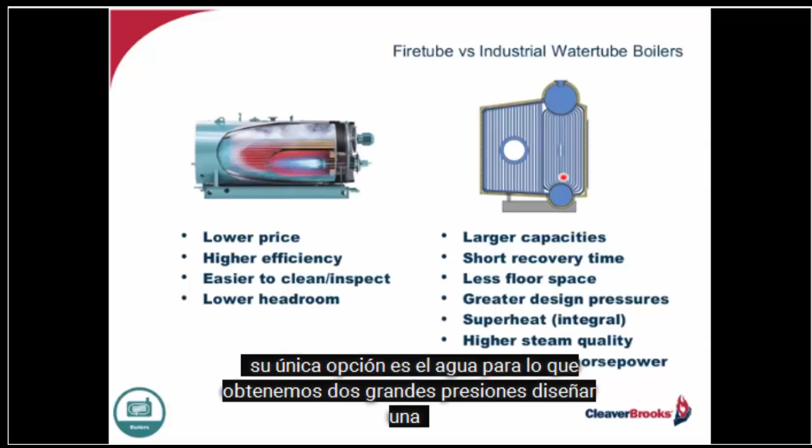What you're looking at here is 4 passes of resistance that we have to overcome. So it really depends upon the particular application, whether we choose a fire tube or a water tube. But when you get to certain capacities, over 2,500 horsepower, your only choice is a water tube. Or if we get to large design pressures and operating pressures as a result, it may be the only real advantage, or the only choice that you would have.

Now, when we look at water tube boilers as a group of product, they start out very small. It's a wide range. Here you're looking at an O-type water tube drum-type boiler, membrane design. This particular one is 150 horsepower, that's about 5,000 pounds of steam.

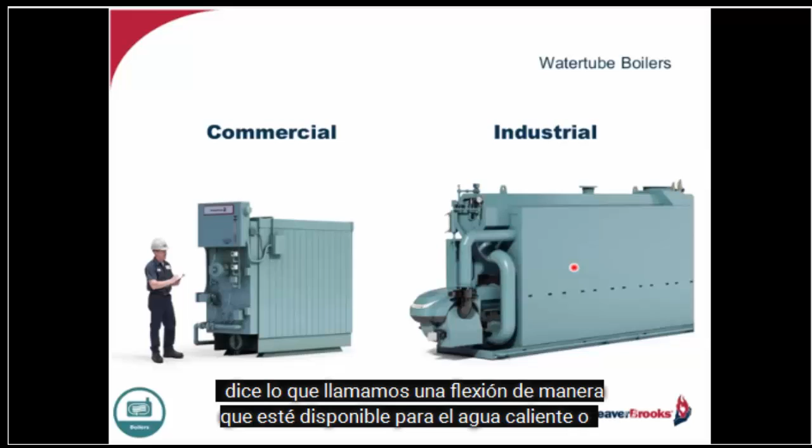Here's another O-type water tube boiler, but it doesn't have vertical tubes. It's got serpentine tubes, what we call a flex tube. So this is available for hot water or steam, low or high pressure steam, sizes up to about 500 horsepower. What you're looking at here, though, is a 300 horsepower boiler, about 10,000 pounds of steam per hour. So we start out small, but then get very large.

And we start looking at different types of water tube boilers. What you're looking at on the screen right now, these are packages. They will ship to the job exactly as you see them, with a burner, casing, and so on. Everything is complete. This is an A-type. It's got an upper drum, or steam drum, and 2 lower mud drums.

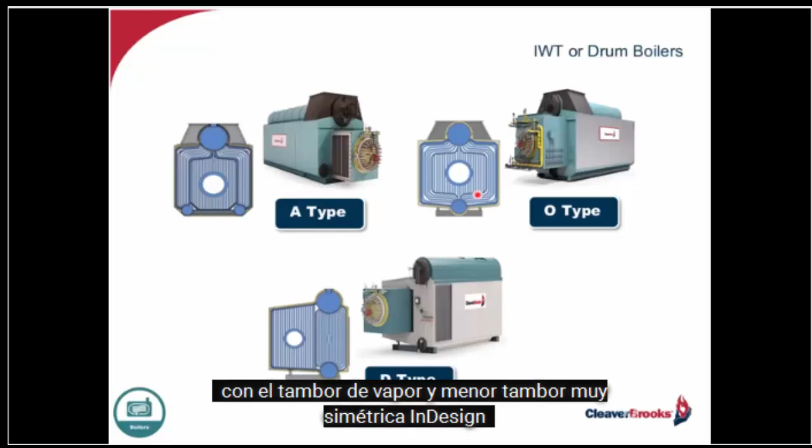We have an O-type configuration with a steam drum and lower drum, very symmetrical in design. This was primarily used for rental type boilers that would go on trailers. If you have a D-type, as you see here, it has a very high center of gravity. These are very low center of gravity, so it ships very well on a truck and very, very good for rental type applications, the O-type.

And then, of course, the D gets its name because it looks like a D, and it could be either a left-hand or a right-hand burner configuration. This is a left-hand burner. So you've got your upper drum and lower drum, and then your furnace is over here. So the D-type, the A, and the O-type configuration. And these are all packages and can ship either this way or as modules, and I'll show you that a little bit later.

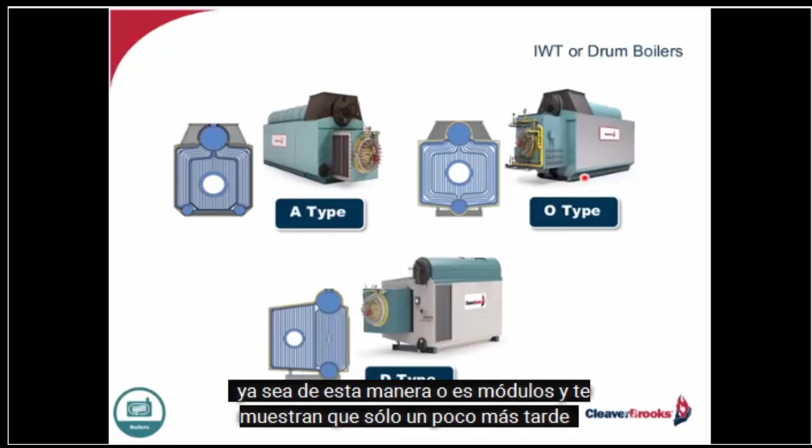Let's see, I missed a slide here, I think. Oh, here we go. Now, when we look at water tube boilers, these are what we call industrial water tubes, or drum-type boilers.

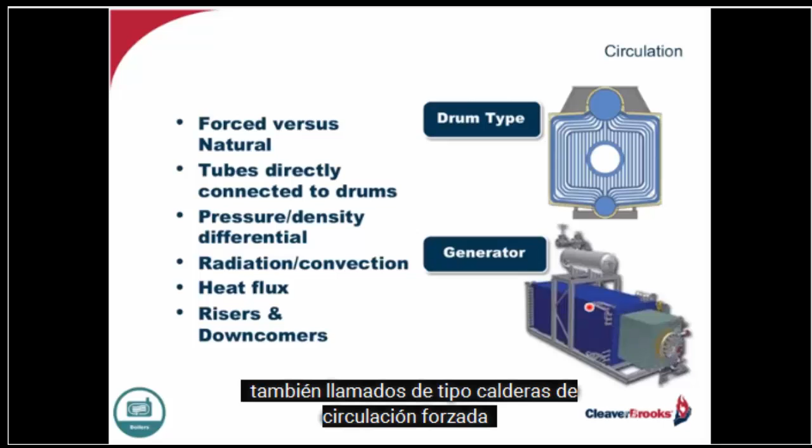What you see down here is a generator, at least what I used to call it in the early days, when I started here at Cleaver-Brooks, we called these steam generators. They're also called forced circulation type boilers. What you see here happens to be an O-type, but it's a drum-type boiler, and it relies on natural circulation. It's the pressure density differential between the upper and lower drums that gives us that circulation.

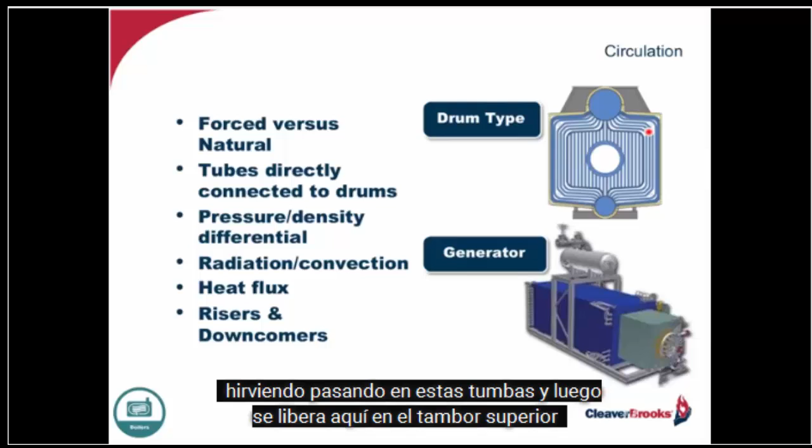So as we begin to transfer the heat in the furnace, and we start to generate steam, we have nucleate boiling going on in these tubes, and then it releases up here in the upper drum, but it's all done naturally. The saturated water, below the steam line, the steam accumulation area in the upper drum, finds its way through these downcomers, and we start to recirculate. So it's all natural circulation.

The steam generator that you see here requires a pump. What you have is about, let's say, 80% steam in these tubes versus 20% water. Just the opposite in a water tube boiler. The ratio of steam to water is much higher on the water side, 80% water as opposed to 20% steam. That's how we get that natural thermal circulation.

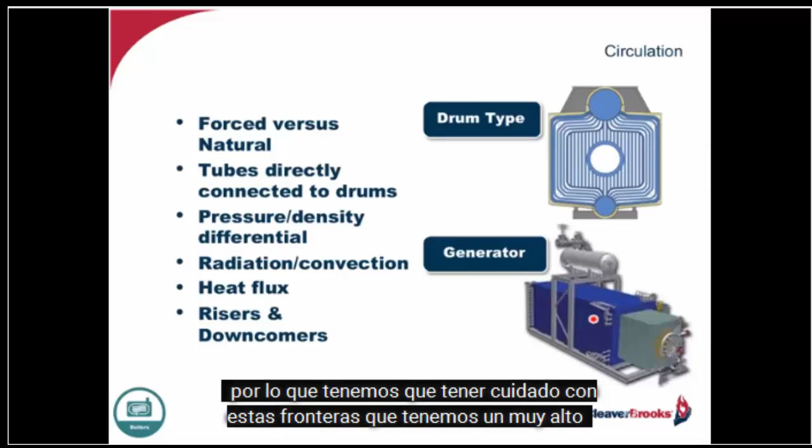These steam generators are good boilers. They've got good applications, but what we're concerned about with those is what we call high heat flux, the temperature differences or temperature gradients that can occur because we have so much steam. So we've got to be careful with these boilers that we have very, very high water quality, or we can have some problems. They're quick steamers. They do an excellent job from that perspective, but we've got to watch the water quality.

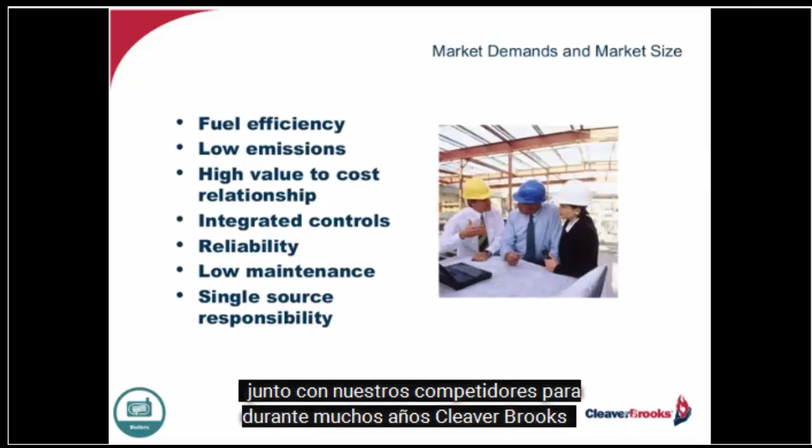As far as the market is concerned, we've been in this market along with our competitors for many years, Cleaver-Brooks for over 80 years, and we've gone out and talked to our customers and looked at applications. When you're talking about industrial water tube boilers, many of these units that we build are custom made.

We have to look very closely at that system, what its requirements are, both fire side and water side, the steam requirements as well as the emission requirements, and what the turn down has to be. It gets very complicated because these jobs are so large in terms of steam capacity. So our customers have been telling us all along what we need.

We definitely have to have fuel efficiency because of the inordinate amount of fuel that these boilers are consuming. If we can save 1 or 2 or 3% in fuel, we're not talking about chump change here. We're talking large, major dollars.

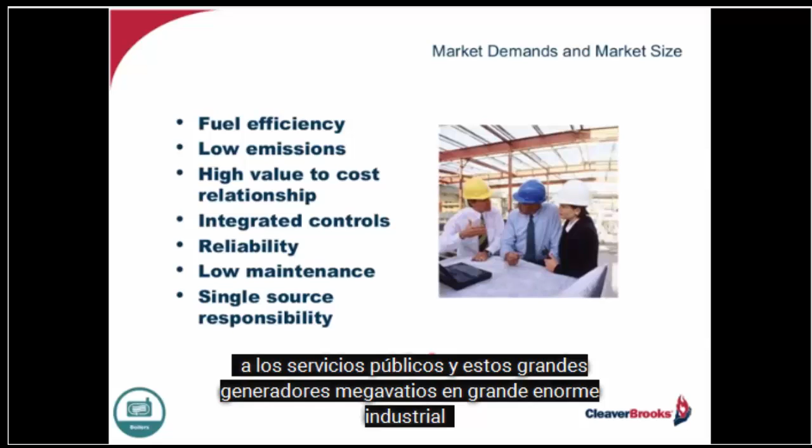Low emissions, of course. This is something we are becoming much more cognizant of as a nation, as a world, in terms of the pollutions that come out of stacks. And the ones being looked at most closely starts with the mobile sources with our cars, but then it goes quickly to utilities and these large megawatt generators and large, huge industrial water tube boilers that we'll be talking about today that emit a lot of effluent out of that stack.

We've got to look at these emissions and make sure that we not only conserve the carbon footprint by burning less fuel, but what's coming out of the stack has to be also very closely looked at, so that we don't pollute the air, cause ozone, and have other problems in terms of carbon monoxide and particulate.

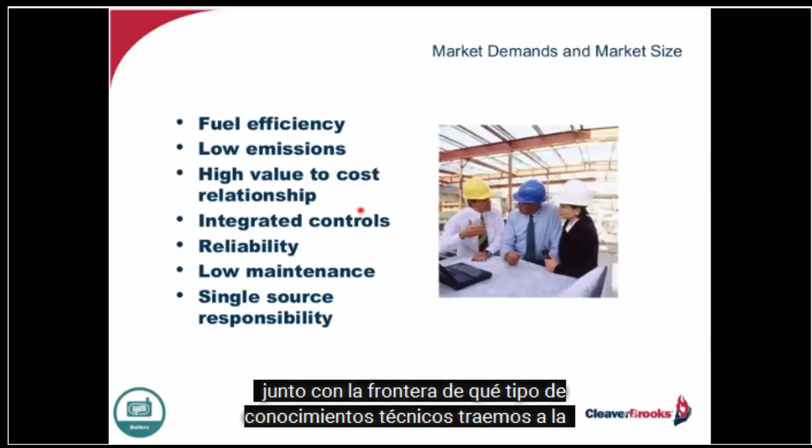And then, of course, they're saying we want a high value to cost relationship. It's not just the boiler cost, it's what do we as an industry deliver along with that boiler? What kind of technical expertise do we bring to the job? How can we best serve that customer in attaining his needs?

And then they want integrated controls. Reliability, of course, is key, making sure that these boilers stay online regularly. We don't want outages. We want to make sure we can anticipate problems before they occur. That gets into the integrated controls, ties into reliability. Low maintenance—what can we do to lower the cost of maintenance, lower the downtime?

And of course, single source responsibility. That just ties into getting rid of the finger pointing, right? Oh, it's the burner guy's problem. Oh, it's the control guy's problem. Oh, it's the boiler guy's problem. No. One person, single source responsibility, bring it all together, be accountable. So it's a tall order.

What about the market? Over 200,000 pounds. You can see here the number of projects and how they have increased over the years. Starting out at 2005, and you see 2012 this year projected, we've gone from a nominal number of packaged units back in 2005, and all of a sudden increasing rapidly. What's driving that is there's an aging population of large industrial boilers out there.

A lot of these are coal-fired, so they're concerned about the emissions as well. They're also looking at ways of maybe burning other sustainable fuels like biofuels. And now, because natural gas is becoming more and more prevalent and available, we've got a lot more of it, especially with the fracking processes we're going through today. And it's getting cheaper. So we've got a lot of customers saying, look, I think it's time to bite the bullet. We'll tear this old boiler out, put a new one in, or we'll retrofit and take this old boiler that I have and bring it up to today's standards.

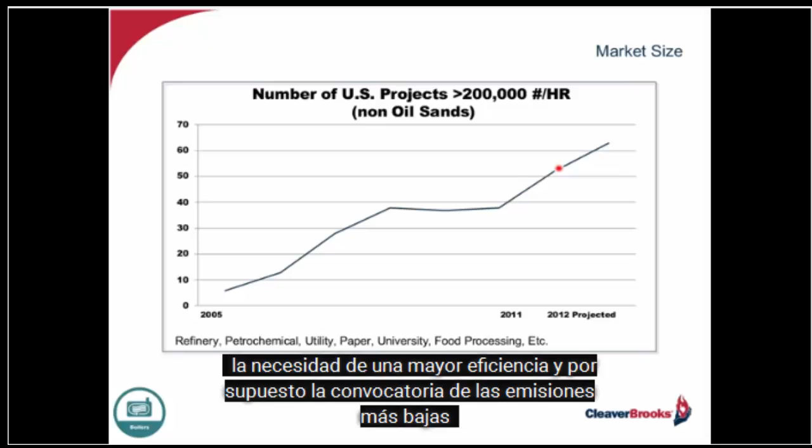So it's about a $200 million market today, over 200,000 pounds per hour. That's about what it is today. And what's driving it, of course, is old boilers, the need for higher efficiencies, and then, of course, the call for lower emissions.

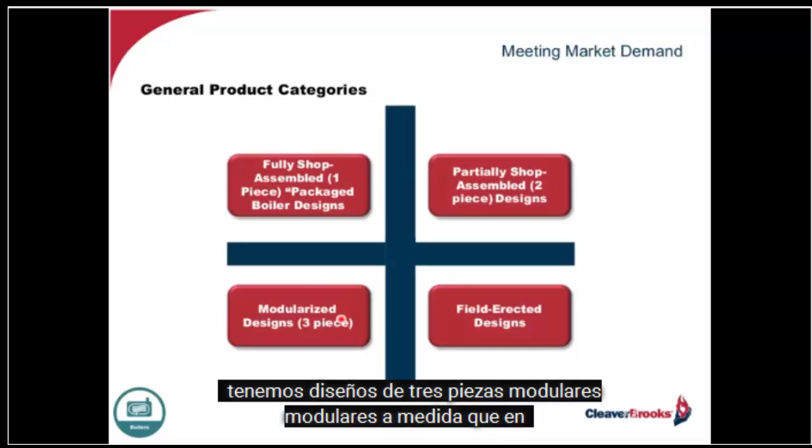Now, when we look at the way that our industry is addressing these needs, what I'm talking about today primarily are going to be packaged units. So we've got a fully assembled one-piece package, which I showed you originally with the A, D, and O type boilers. We also have partially shop-assembled two-piece designs, which I'll show you. Then we have modularized three-piece designs as you get into larger capacity needs. And then we have the field-erected.

So for today's discussion and our focus, we're looking at 200,000 pounds per hour up to 650,000 that can be built or delivered in these forms.

Now, how does it break out? Well, if we look at one-piece, fully assembled units, 10,000 to 300,000 pounds of steam per hour, we can ship those as a complete unit in one piece, and I'll show you some examples of that.

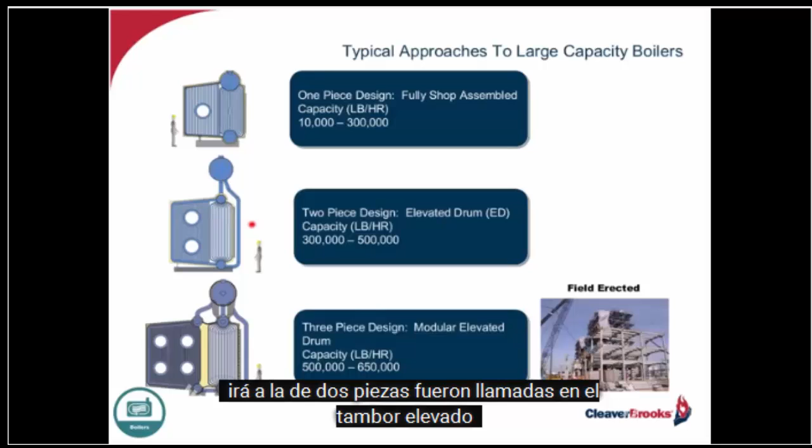As we get into larger capacities, 300,000 to 500,000 pounds per hour, we'll go to the two-piece. We're calling it an elevated drum, two-piece, and I'll show you how that works. And larger sizes, packages, modularized packages from 500 to 650,000 pounds of steam per hour, that's 19,000 horsepower, come in three pieces. And then, of course, there's the old reliable field-erected unit.

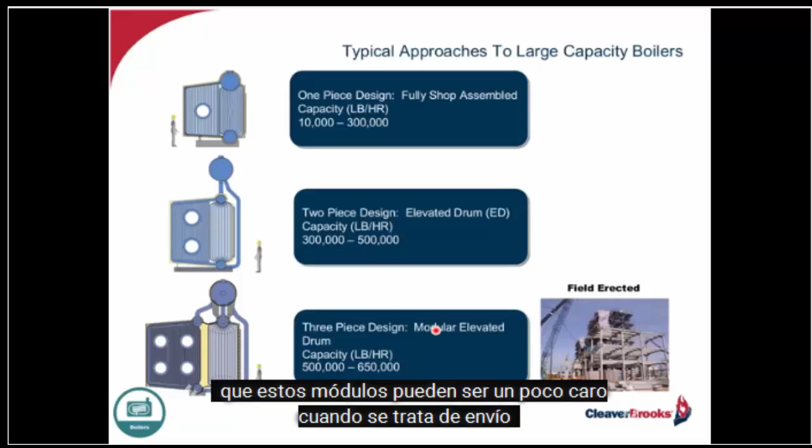Now, I will say that these modules can get a little expensive when it comes to shipping. And in some cases, the only answer that our customer might have, if we're going to be truthful and honest with him or her, would be a field erected. Maybe it's got to be stick built, as we say. It has its place, but our customers are saying single source responsibility, let's mitigate the field time, and if you can make these boilers, either modules or packages, more convenient and less expensive for me to install and operate overall, that's the way I'll go. But we also have to look at the field erected as an option.

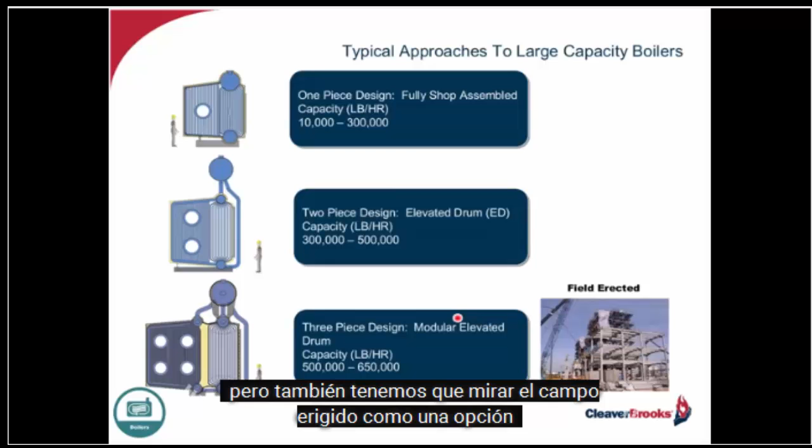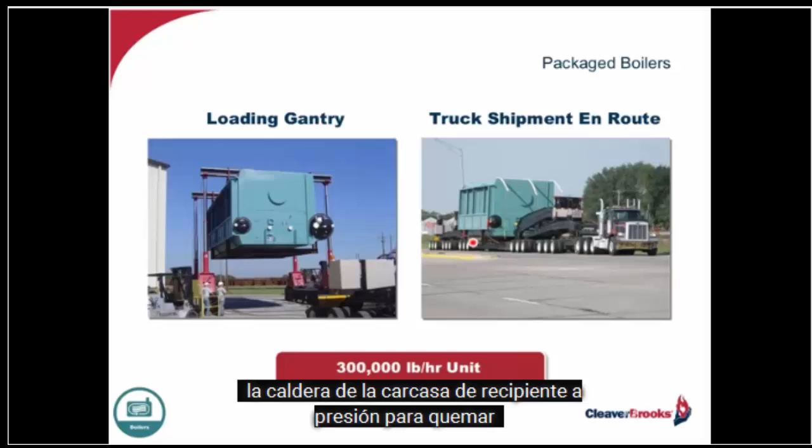Now, here's a package boiler, 300,000 pounds per hour. Normally when these boilers get over 225,000 pounds per hour, we can't ship them as a complete unit. We've got to ship the burner and controls loose, and that's what you're seeing right here. You can see it on the truck. This truck, by the way, has 74 tires if you were to count them. But it's complete - it will arrive at the job site complete with the boiler, the pressure vessel, the casing, the burner, the controls, all done.

Now here's a 50,000 pound per hour boiler, and what I wanted to call your attention to here is the single source responsibility, the total integration is reflected here in this picture. Now it looks somewhat complicated, but really it isn't. It's a D-type boiler, 50,000 pounds per hour, as you can see.

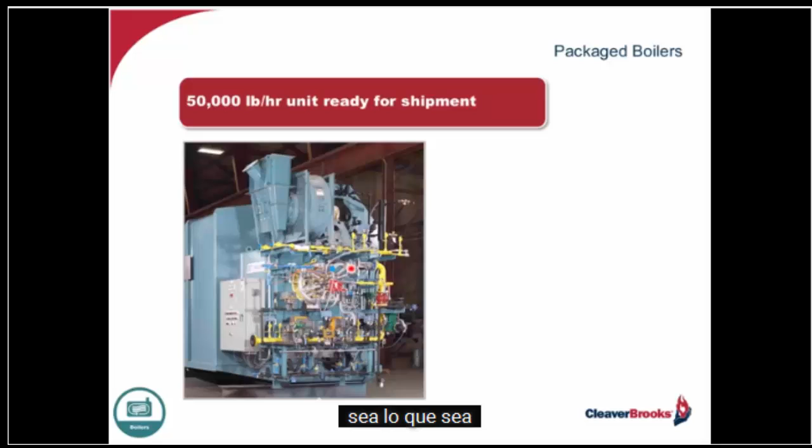We've got our fuel line all pre-piped and wired. Our pilot line coming in here. We've got standby oil - this is our oil line coming in when we go and burn number 2 or number 4, number 6, whatever it might be, oil. We also have our secondary air fan for combustion. That's all completely packaged, wired, and mounted. This is your flue gas or your secondary air inlet for combustion.

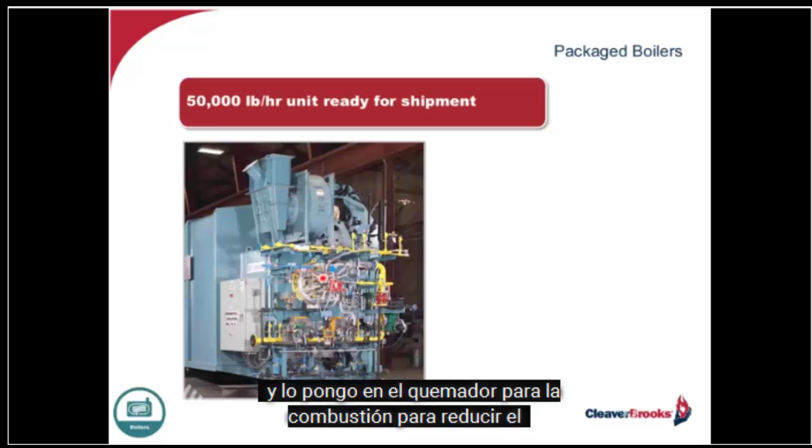This is the connection for flue gas recirculation. In this particular case, we had to lower the NOx. We had a low NOx burner on here, but we also had to introduce flue gas recirculation to lower the NOx even more, to take it down to, let's say, 20 parts per million from a normal 120. So we had to use some of the flue gas coming out of the stack, ducted into the secondary air supply, and bring it into the burner for combustion to lower what we call thermal NOx. That's called flue gas recirculation.

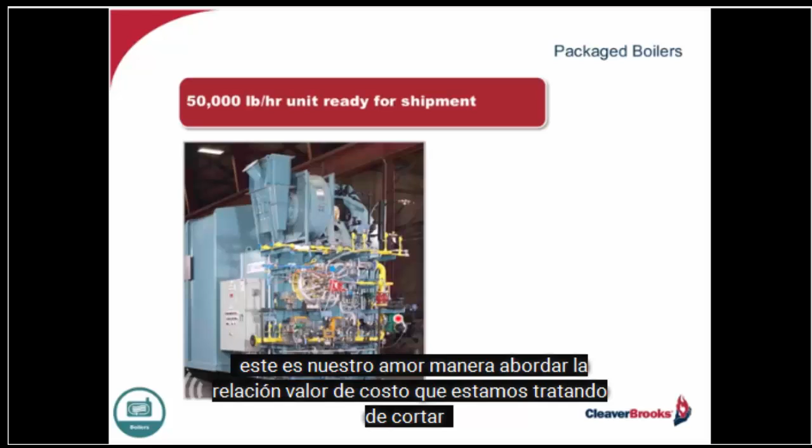But again, when you see these packages, whether they come from us or one of our competitors, this is our way of addressing single source responsibility. This is our way of addressing the cost-value relationship. We're trying to cut cost out of the total project and give our customers as efficient and reliable a package as we possibly can.

In an ideal situation, where we haven't got conflict with other disciplines on the job, it takes about 25 man days to mount that burner and all the controls and wire it on this boiler. About 25 man days.

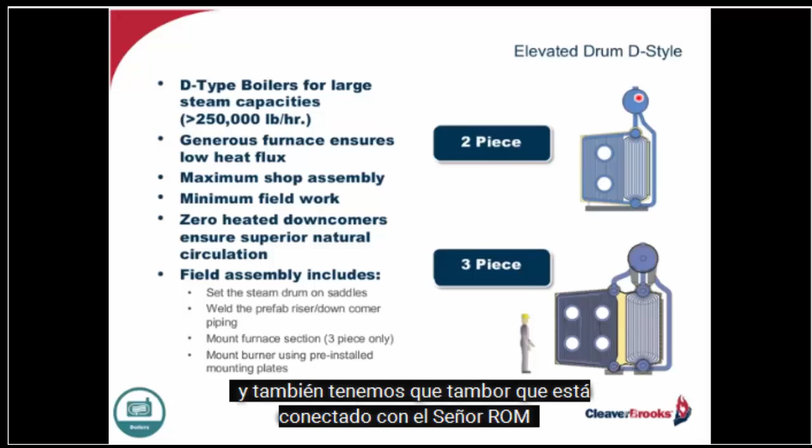Now we're going to move from the packaged water tube boiler to what we call the elevated drum, or 2-piece and 3-piece modules. In this particular case, I'm showing you a D-type design configuration. You can see we have the elevated drum, which is connected to the lower drum through what we're calling the downcomer.

Here we have the generating section of the furnace side. These tubes are generating steam into this header, up into the steam drum. These range anywhere from this capacity, 300,000 to 650,000 pounds per hour.

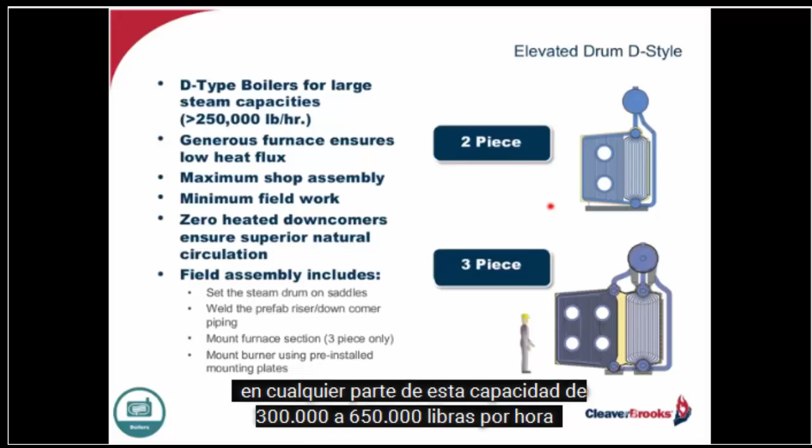A 650,000 pound per hour boiler is going to have a total burner input of about 780 million BTUs. So looking at this particular boiler, which is 650,000 pounds per hour, we have 4 burners, each rated at about 195 million BTUs per hour.

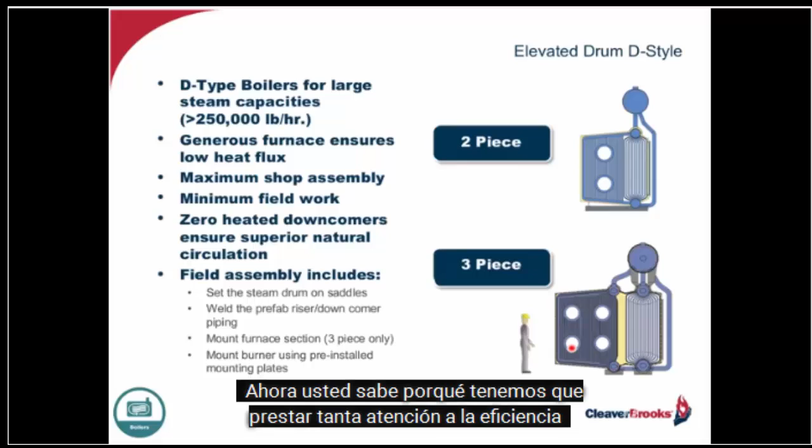Now you know why we have to pay so much attention to efficiency, right? We're burning an awful lot of gas here.

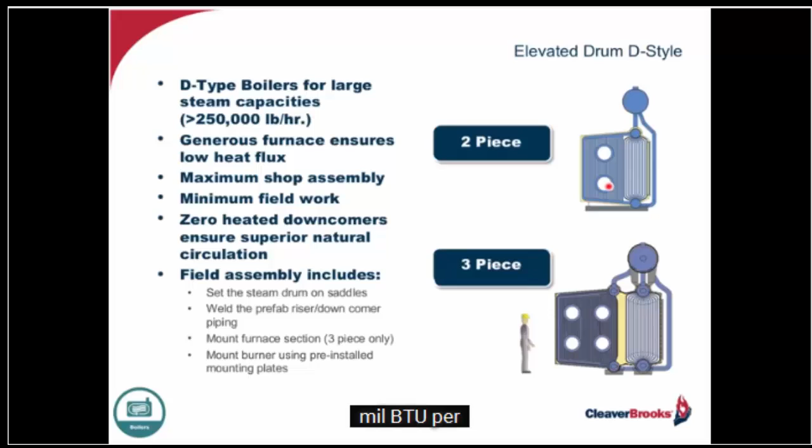The thing about these elevated drum designs, the other advantage it gives us, is that we can make this drum as large as we want, and it does not encroach on either the convective side or the radiant side of our boiler. That means we can increase the size of the furnace to lower the heat release rate down to areas in the 60 to 70,000 BTU per cubic foot of furnace volume.

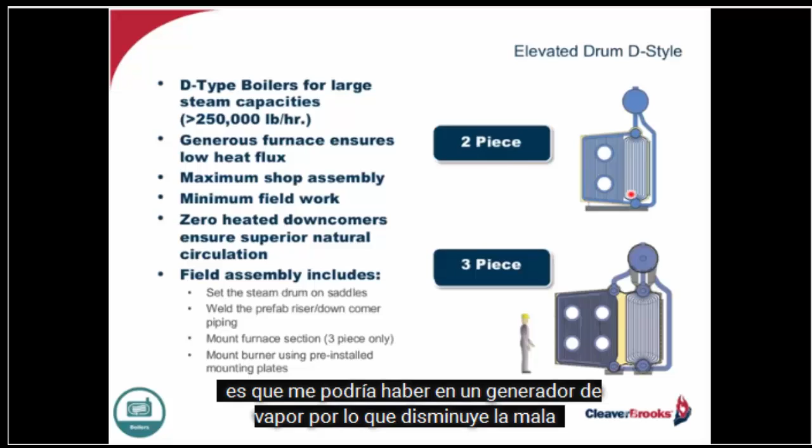Also looking at that heating surface, that's about 47 to 50,000 BTU per square foot. Why is that important? Well, from a couple of standpoints, not the least of which is the feed water coming into this boiler. If I can lower the absorption rate in that furnace, I don't have the rapid heat flux I might have in a steam generator, so it mitigates the temperature transients I would get in other types of boilers with higher heat release. It also helps from the emission perspective, since I can control the flame temperature more readily to lower the NOx requirement.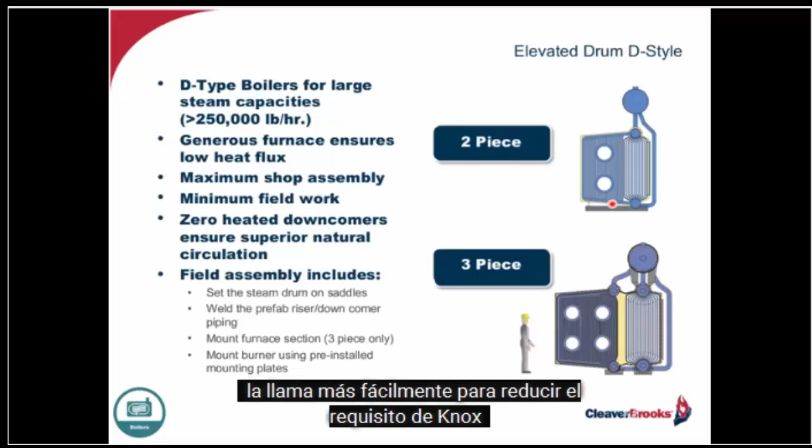The other thing with these are the downcomers, which are isolated, giving me rapid circulation through these generating tubes as they generate steam and water into this upper drum to be separated, which I'll show you as well.

Now, looking at the elevated drum design, here's this D-style 225,000 pound per hour package boiler. They get larger as you go along. Here's a 300,000 pound per hour boiler that requires 2 burners, and then the ED-type right here at 500,000. All I'm trying to show you is how this boiler gets so much taller, but not that much wider.

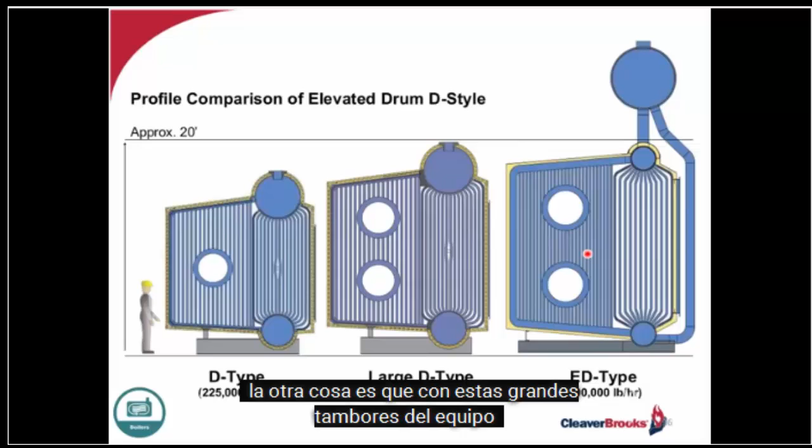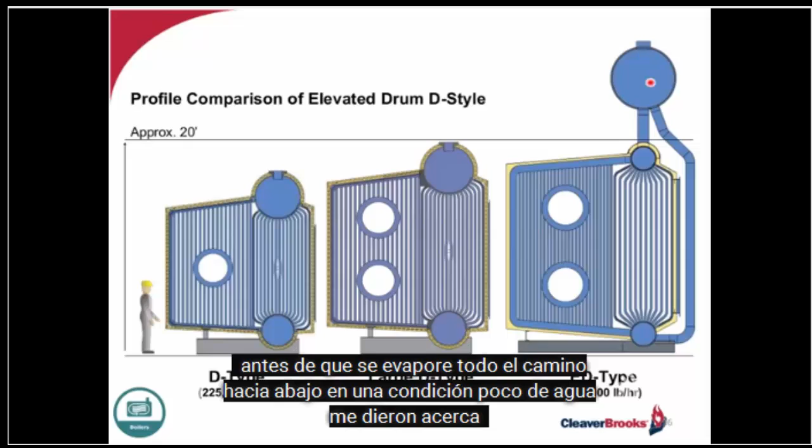The other thing is that with these large steam drums, I've got more steam accumulation area. So when there's a sudden surge or need for steam, I've got more accumulation in this upper drum than otherwise, because with this modular design I can make it bigger. I've also got a larger margin of water - anywhere from about a third of this drum is water - so before it evaporates all the way down to a low water condition, I've got about 5 minutes between proper level and low water. We certainly don't want a waterside occurrence here with these boilers. No boiler for that matter - even a 30-gallon water heater is devastating.

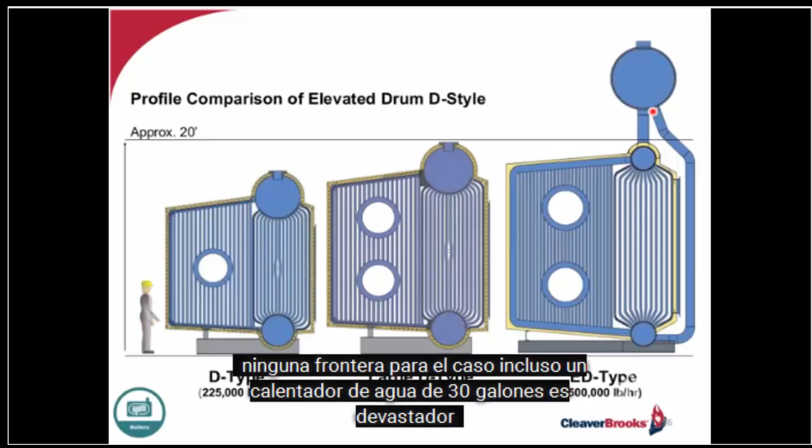Here you see the 425,000 pound per hour elevated drum water tube boiler.

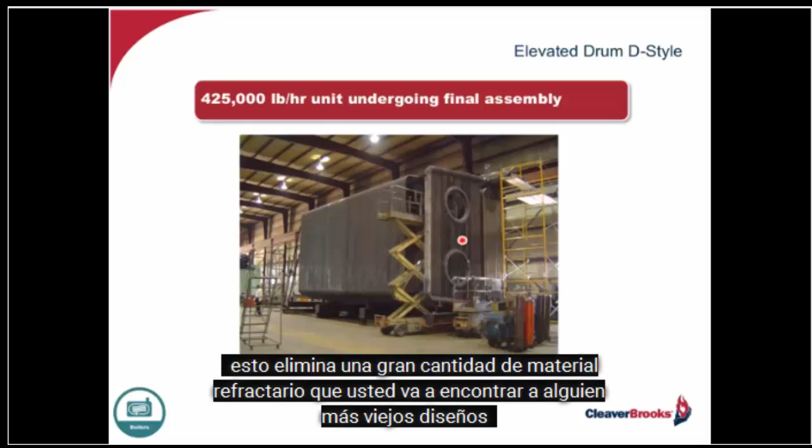You'll notice it's kind of hard to see in this picture, but these tubes are all membraned - attached to the drum, or to the manifold, I should say. In this case, our steam drum is a separate piece mounted in the field, but they're all membrane tubes. This eliminates a lot of the refractory found in some older designs, which gets back to what our customers are saying: let's lower that maintenance requirement.

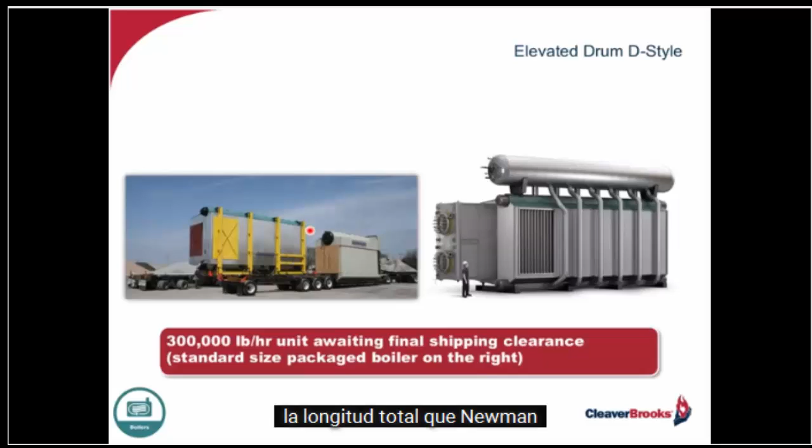Now here's a 300,000 pound per hour unit which is being shipped. It's an elevated drum boiler. You can see the size difference between it and a standard size package water tube boiler. This is 300,000 pounds per hour. It's got superheat, and that, like I showed you in that picture before, is going to extend the overall length of that unit because of the superheat.

Now this gives you a good shot of what that elevated drum boiler looks like, whether it be a single, a two-piece or a three-piece. You can see here the upper steam drum. These are the downcomers. We need that pressure density differential to give us that good circulation. These isolated downcomers help that considerably. Then, of course, you've got your generating section here, and this is your flue gas outlet.

Now, this particular one is a 500,000 pound per hour elevated drum water tube boiler. It's about 600 million BTU input. So each one of these burners is about 300 million BTU.

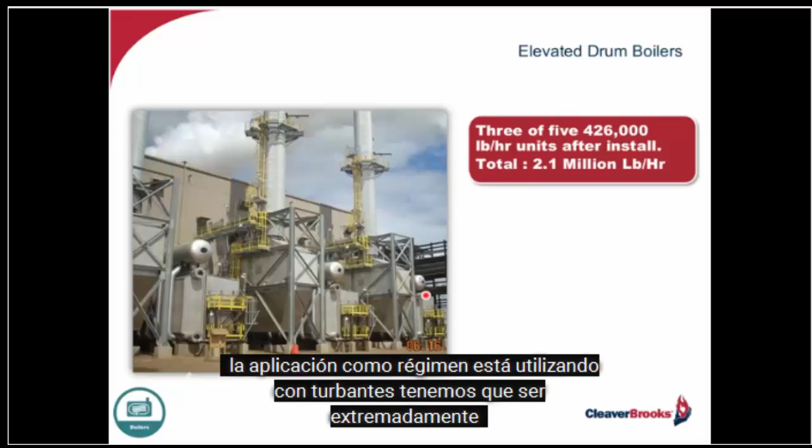Now here you see a utility application where we have 5, 426,000 pound per hour boilers equating to 2.1 million pounds per hour. You only see 3 of them, but there are actually 5 on the job. Now, these are economizers that you see on the side of the boiler. Because this is a utility application, these boilers are generating steam for steam turbines that are driving generators. Anytime you get into the application of steam being used with turbines, we have to be extremely concerned about water quality.

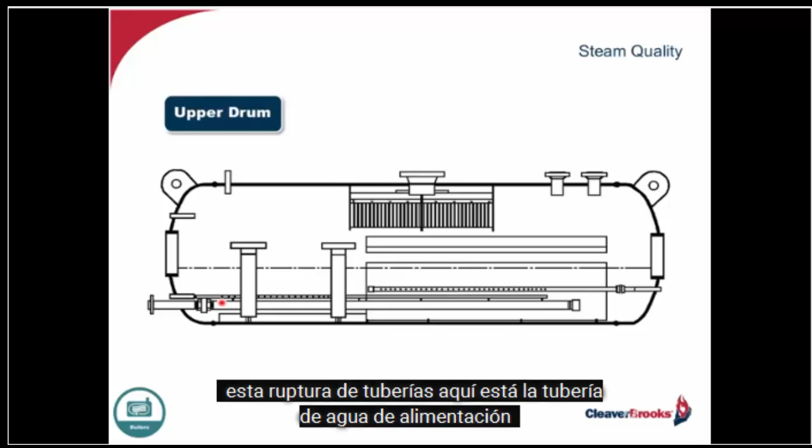This is the upper drum. It's kind of a standard design that you see right here, the upper drum or the steam drum in a water tube boiler. This pipe is your feed water pipe. This is your chemical dispersion tube. Now, what you also have is a chevron separator below the steam nozzle itself. There are also some other baffles, which I'll show you next, that are right in front of the steam generating tubes. The whole idea here is to separate the steam as effectively as we possibly can from the saturated water.

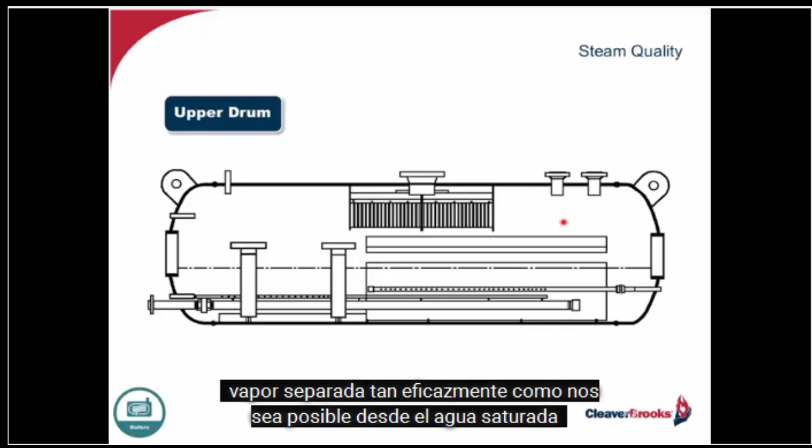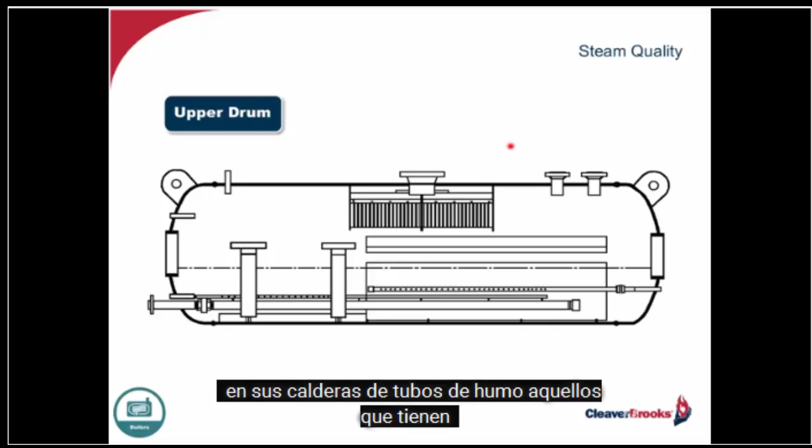That's what we call steam quality. How much moisture is in that steam when it goes out the nozzle into my system? With a fire tube boiler, you're talking about 98.5% pure. In other words, it's got about 1.5% moisture in your fire tube boilers. Those have to have steam separators in the steam line to be able to improve the overall quality of the steam, to remove the moisture.

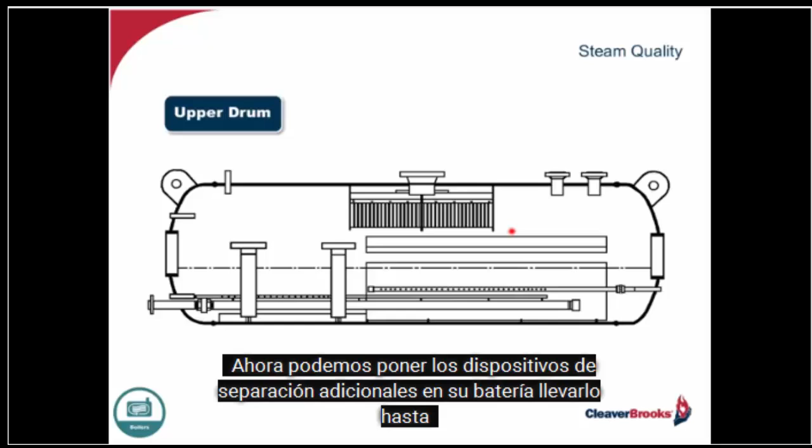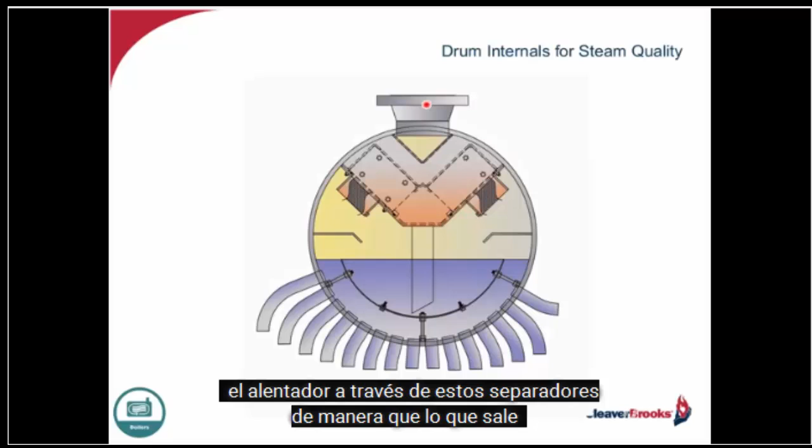Water tube boilers are normally set up to achieve 99.5% quality, giving us only 0.5% moisture. Now we can put additional separating devices in this drum and take us down further, and that's what you'll see here, a chevron separator. You've got your baffles here, which are now in front of your generating tubes. The whole idea is for this steam to take a very circuitous route through the separators, so that what comes out can be as low as only 0.1% moisture. And that could be critical for those applications, especially turbines, that cannot tolerate any moisture in that steam.

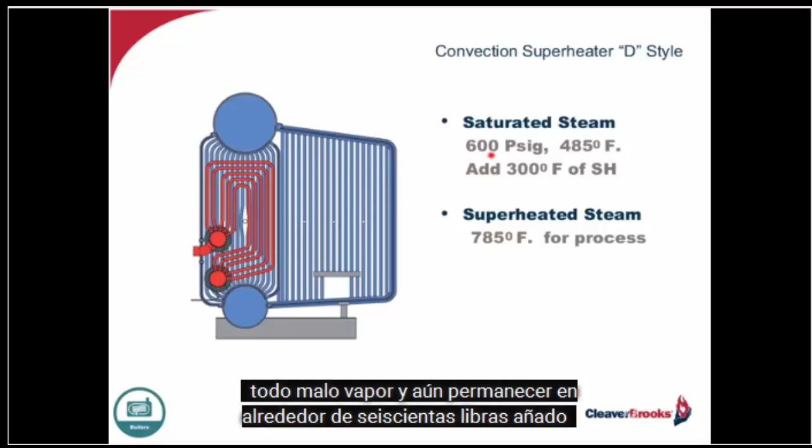Now, what you'll also find in what I showed you before are superheaters. What are superheaters? Superheaters take that saturated steam when it comes out of the nozzle, and it heats it further. It adds additional sensible energy to it. In other words, I've got 600-pound steam here, which is equivalent to 485 degrees Fahrenheit. But what I want to do is raise the temperature of that steam and still stay at about 600 pounds. I add superheat. So what I'm doing is adding sensible energy. So now my 485 degree steam has been boosted to 785 degrees.

Now remember, the critical point of water, where it becomes nothing but a working mass of steam, with no further evaporation because all the moisture is gone, is 705 degrees, equivalent to 3,200 pounds. Here I have 785 degree steam, but only about 600 pounds. That's superheat, sensible energy added to that steam.

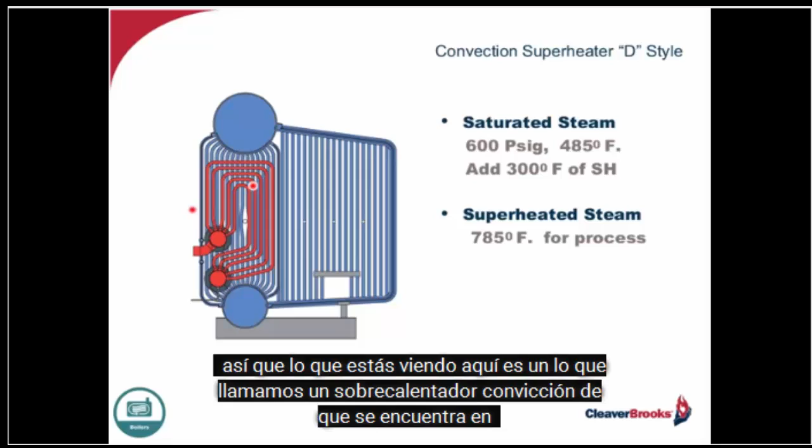So what you're looking at here is what we call a convection superheater. It's in the convection side of my boiler. This is my furnace, here's the convection. So my superheater is taking steam from the upper drum, bringing it in, taking it through a series of baffles and headers, heating it up further, and discharging here.

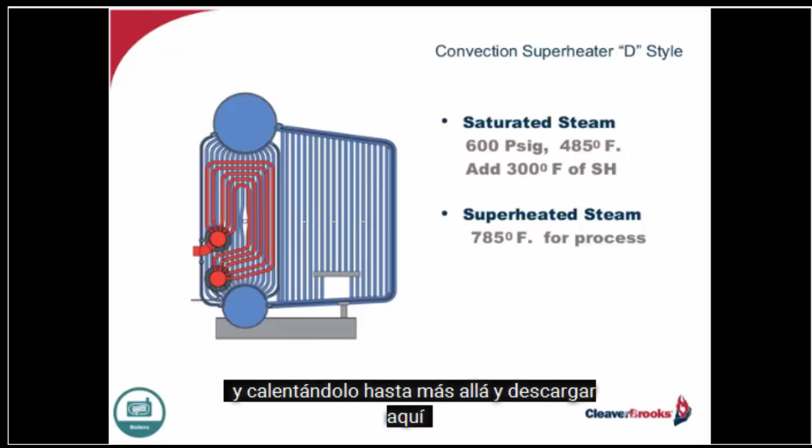Looking at it from a plan view, here's my furnace. I've got vestibule tubes here in the back where those hot gases exit, come across the superheater, add that sensible energy before it goes up and out the stack. In this particular case, it was going to an economizer.

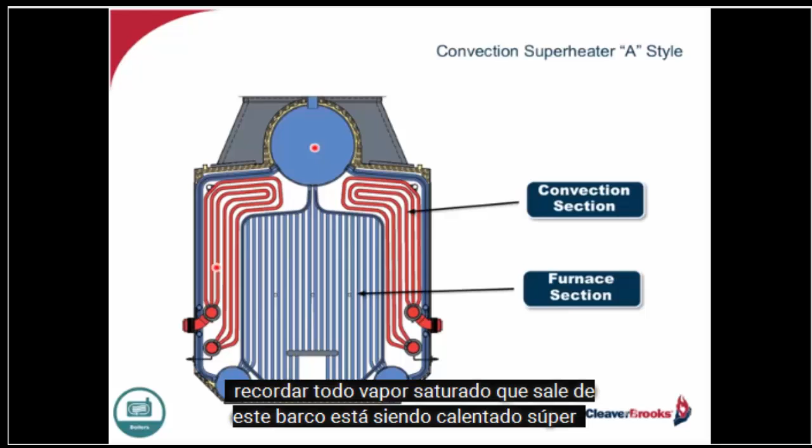Now here's an A-type boiler with a convective superheater system. Because we bifurcate, or drive our flue gas down the center of an A boiler, that gas divides and goes equally either side of the boiler through the convection sections. That's why I've got two superheaters here. So remember, all the saturated steam coming out of this boiler is being superheated in this case.

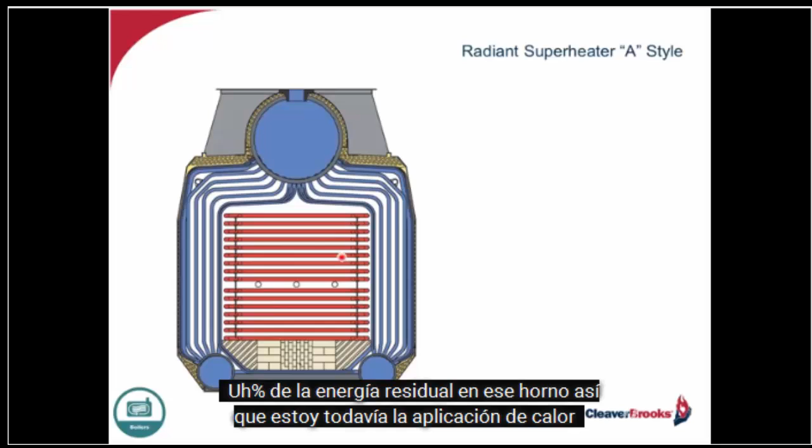This is also good from the standpoint of consistency. In other words, even when this burner cycles off, you've got a lot of residual energy in that furnace, so I'm still applying heat to the radiant superheater.

The problem with these, though, is that you really have to watch your water quality. You have to really watch flame impingement. So when radiant superheaters are applied to a boiler because of footprint, we've got to make sure the proper engineering goes in to assure ourselves that we do not have problems with this radiant superheater because it's in such a hot area. The radiant area of that furnace is extremely hot. We're looking at temperatures in excess of 2,000 degrees here. So you have to be very careful of flame shape, size, and length so that we don't have problems with that superheater, and the water quality as well.

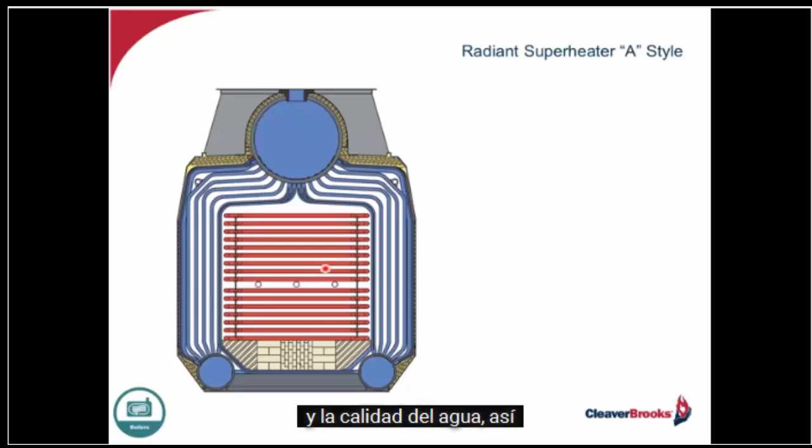Now, there are some applications where they just want a small amount of superheat. Quite frankly, it doesn't make sense to try to incorporate that small superheater in a boiler. First of all, it just wouldn't work anyway. How would you protect it? How would you control the flow? So we can go to external superheaters.

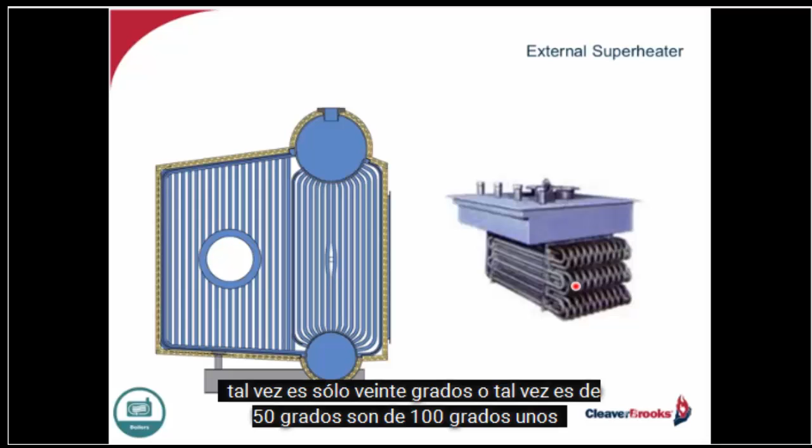Why would I need something like that? Well, maybe what's happened is I've got a process that's been added on, and I've got hundreds of linear feet of piping from my power source, my boiler, to that particular process application. I want just a certain amount of superheat applied, maybe only 20 degrees, or maybe 50 or 100 degrees of superheat, so that steam does not condense before it gets to the process. That's the only reason I'm adding that superheat. It's that sensible energy, so it won't condense before it gets to the user.

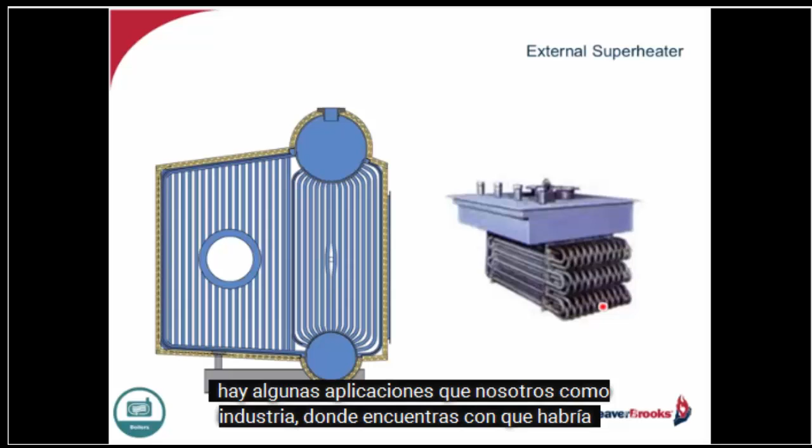So we can use external superheaters. There are some applications that we as an industry run into where that would be our recommendation.

Now, water quality, of course, is extremely important with these water tube boilers. As I said before, even if we're doing elevated drum design where we've got lower heat releases in the furnace, it's still very important that we watch the water quality, because the overall heating surface in these units is relatively small compared to a fire tube, for instance, which would be a little bit more forgiving.

So we have to look at the water going into the boiler as well as the boiler water itself. The main thing we're concerned about, besides iron and copper and other things we have to be mindful of in the feed water before it goes into the boiler, is that the hardness is so important. You can see as I increase in pressure from 300 to 450 to 600, it becomes a bit more punitive. We've got to watch it. The higher the pressure, the commensurate temperature is going to increase as well. And the higher that temperature, the easier it is for these rocks to drop out of the water—I'm talking calcium and magnesium. So we're looking at three-tenths of a part per million.

3/10 here, 2/10 here. Remember, looking down here, one grain of hardness is equivalent to 17.1 parts. It's very important that we have good warm lime or zeolite water softening. Extremely important. The other thing is the boiler water itself—we've got to watch the alkalinity, and you can see what happens with the alkalinity tolerances as we increase in pressure.

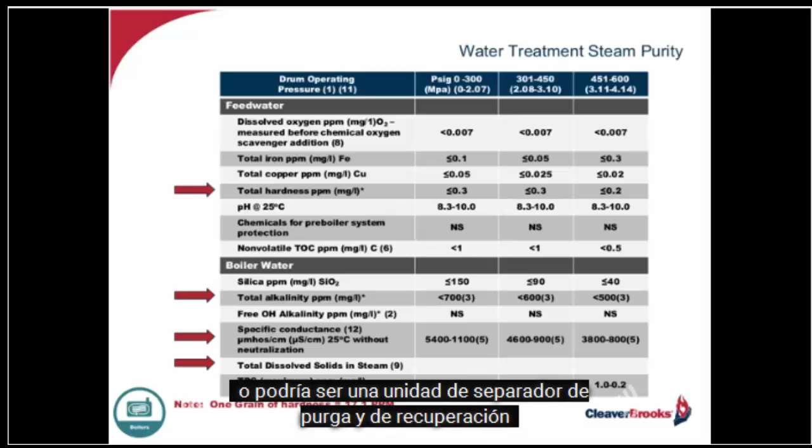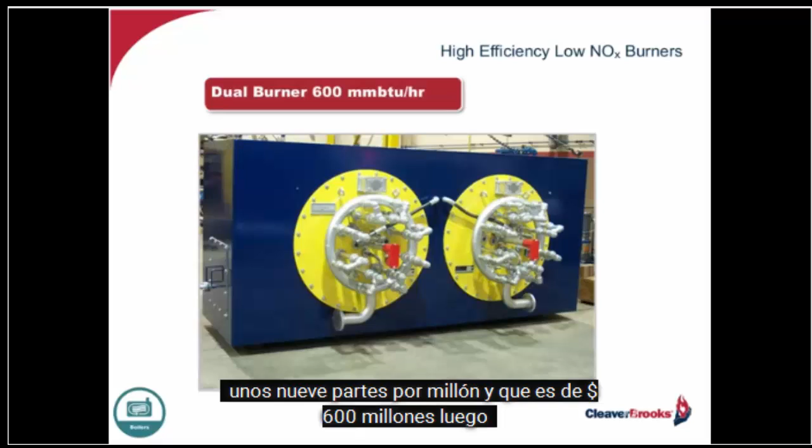This particular one is low NOx, about 9 parts per million, and that 600 million BTU input would be affixed to a boiler that generates about 500,000 pounds of steam per hour.

What's very important with these burners is that they are properly matched to the furnace. This is where the total responsibility, total accountability of the manufacturer comes into play—we have to make sure these burners are properly sized and configured for this particular furnace, because the last thing we want is impingement, the last thing we want is generating CO because of incomplete combustion, and the last thing we want is low combustion efficiency.

This is the radiant area. Remember, when we get into emissive absorption in this area, we're talking about delta T differences that are to the power of four—high energy here that we have to recoup. That's why these furnaces are as large as they are; a lot of BTUs to be grabbed here.

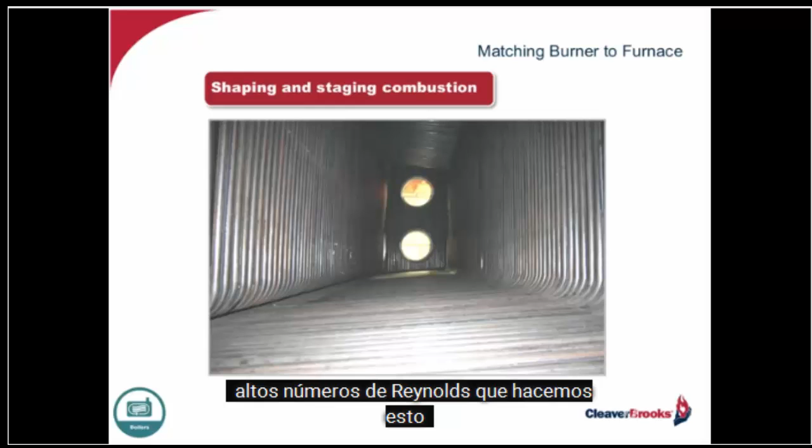We're looking at high Reynolds values, and we're optimizing the overall heat transfer with those high Reynolds numbers. We do this through computational fluid dynamics, wherein these high temperature Reynolds values are associated with both inertial and viscous forces. In other words, we have to make sure we're breaking up that laminar flow to get good heat transfer, and we're looking at values in excess of 4,000 with our Reynolds numbers.

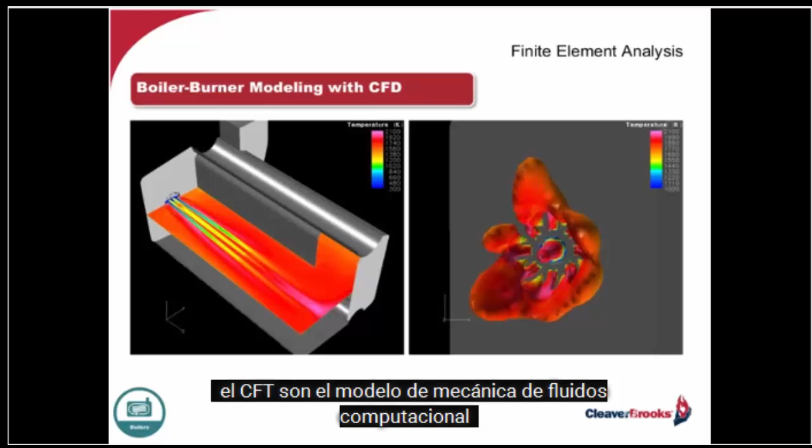So we can compute what's going on with these furnaces, the burner-furnace matching, by using computational fluid dynamics. It not only calculates but also shows us visually what's going on with that particular match. Then we prove it through finite element analysis, which reduces the complex partial differential equations to smaller, less complex linear equations. Then, through the use of matrix algebra, the CFD or computational fluid dynamic model is either proven or then adjusted.

So in the end, what you wind up with is a burner configuration that has been designed and configured for that particular package, giving us the type of airflow, the shaping, the length, the amount of emissivity in the furnace that we need, the high Reynolds numbers. All that is now completed through computational fluid dynamics, and the burner is then matched to the furnace.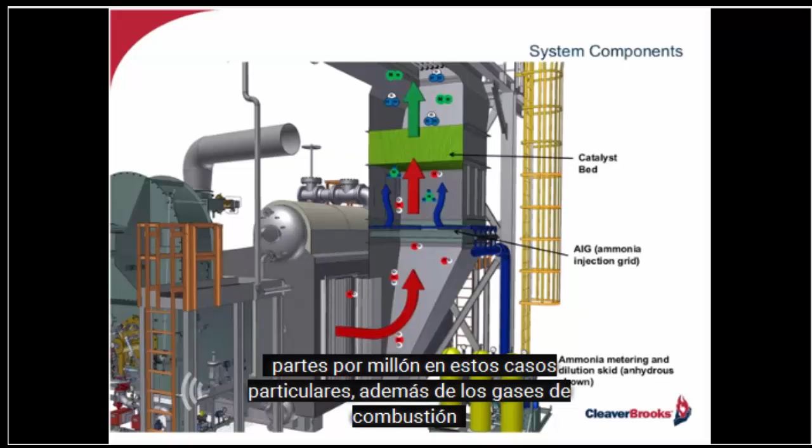Now, when we get into the reduction of NOx, I mentioned earlier the use of flue gas recirculation. There are certain customers out there that require NOx to be lowered to very, very low single digits—maybe 1 or 2 parts per million. In these cases, in addition to flue gas recirculation, I may be adding a selective catalytic reduction system, where we have ammonia as the reductant, laid on a catalyst.

The flue gas passes over it after flue gas recirculation is part of the combustion process, so we've lowered our NOx to a certain level. It comes into the SCR, and we come out with very, very low levels, with nitrogen and water—selective catalytic reduction.

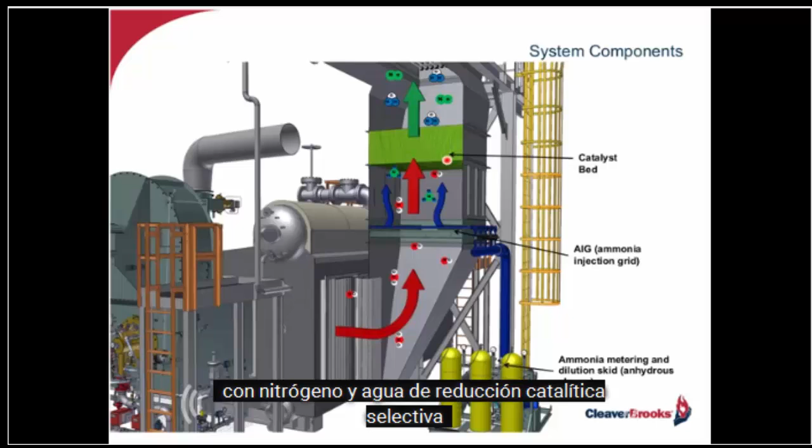As far as the overall controls for these boilers, we have a burner management system, and we also have a combustion control system. The combustion control system essentially has ancillary inputs which monitor and control the overall operation based on ever-changing variables such as steam flow, feed water flow, drum level, ambient air draft, you name it. So I've got burner management sequencing and controlling my burner, integrated with a combustion control system that ties in all those other variables, monitoring and controlling those as well.

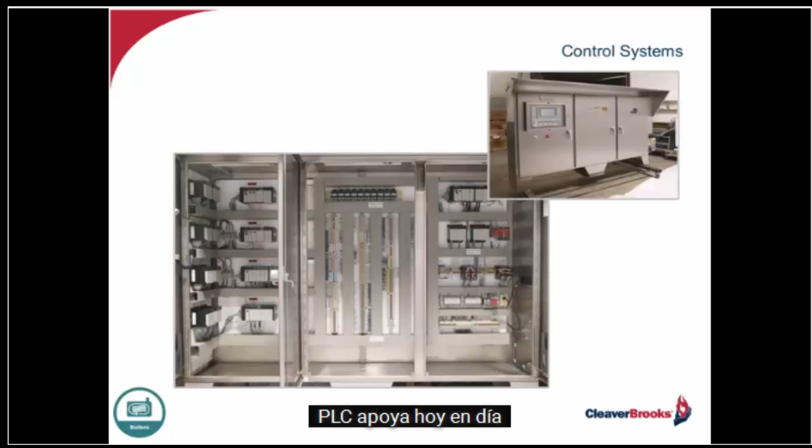It's all then packaged in a complete control system, PLC-based today. Most of these jobs are customized. So I've got my burner management system, I've got my combustion control system, all integrated and wired into either multiple panels or a single panel as it arrives at the job site.

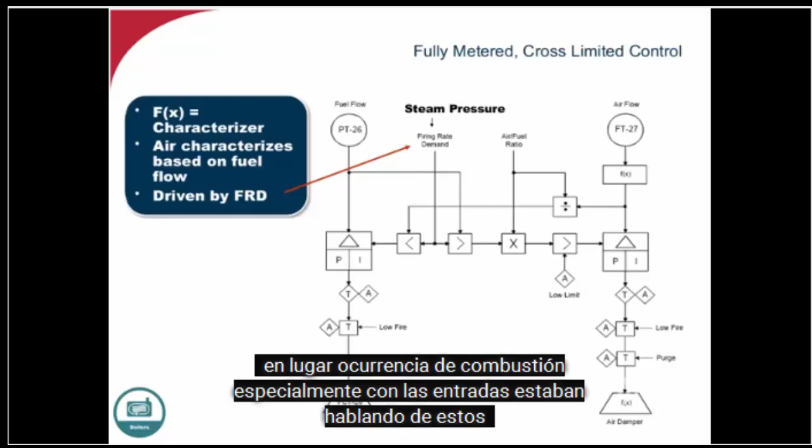It might also include things like fully metered cross-limited control systems where I can linearize and measure process variables such as pressure, fuel flow, and airflow. A fully metered cross-limited system assures you that no matter where I modulate, air will always lead fuel. In other words, I want to stay on the lean end. I never want to go fuel rich or have a combustion occurrence, especially with the inputs we're talking about with these boilers.

And then, of course, for the operators, the PLCs today have very user-friendly graphics, touch screens, switches, alarms, everything there to not only show them what's going on operationally now, but also a lot of information that can be logged, trended, and sent to the facility itself, to various locations, or remotely.

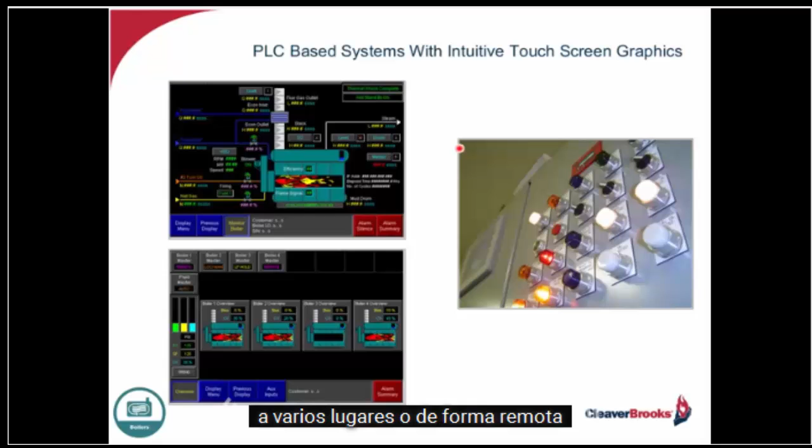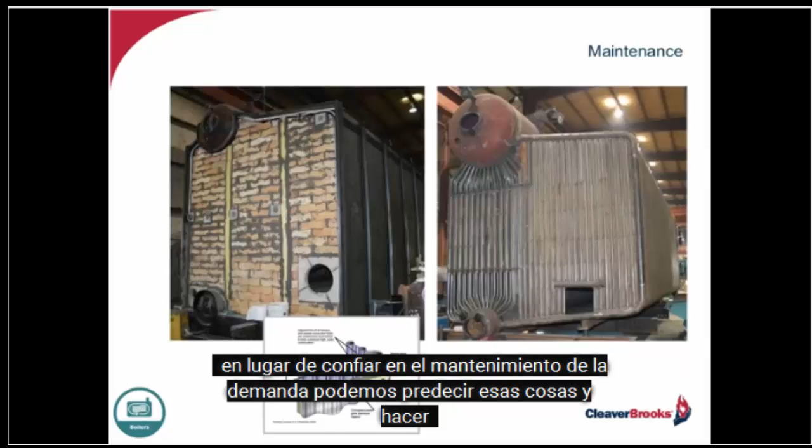As far as maintenance is concerned, we've got to do whatever we can to reduce the maintenance requirement, as our customers have said. A lot of that is done through the PLC-type control systems so that we can predict rather than rely on demand maintenance. We can predict those things and make sure that we don't take that boiler down at the wrong time, which would be so costly to the process.

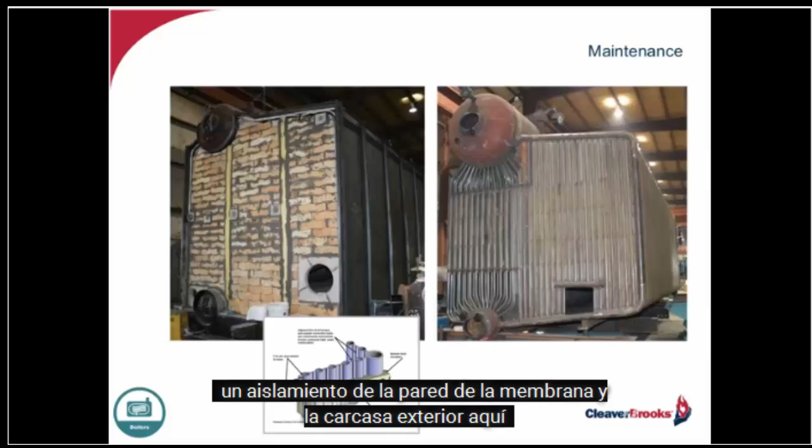The other thing is we've gotten rid of a lot of this old refractory. We've replaced it with membraned walls. So now you have a membrane wall, insulation, and an outer casing right here, and that's it. These boilers would require a seal welded inner casing because most of these have a tangent wall. Good boilers, but again, when we're looking at maintenance, this fully membraned type of drum boiler is so much more effective.

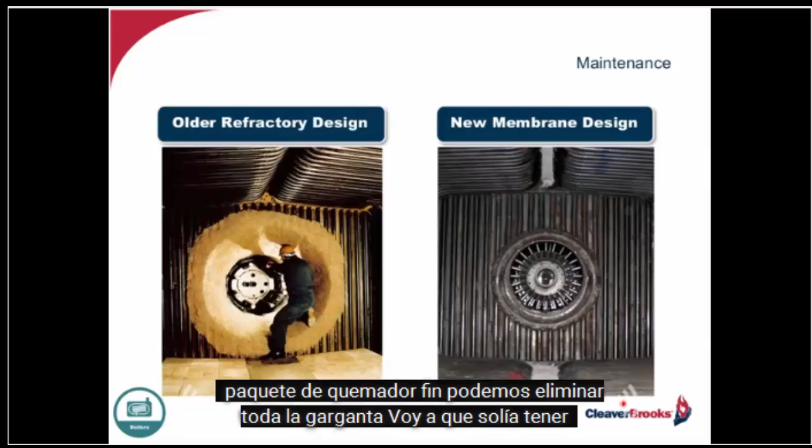The only refractory we're seeing in these boilers is a bit of a seal that you see here, and that's about it as far as the furnace is concerned, and nothing on the front wall either. If we've got the proper boiler burner package, we can eliminate all the throat tile that we used to have, which was used to aid combustion and also help shape the flame. But it's a maintenance headache, and so we as an industry are trying to get away from as much of that as we possibly can.

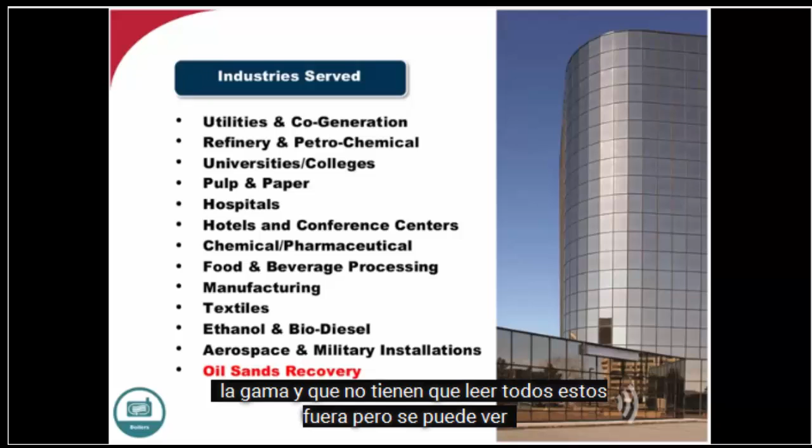As far as the industries we're addressing with these boilers, it runs the gamut. I don't have to read all of these off, but you can see, and this is only a few of what we address. It's mind-boggling where steam is used in this country.

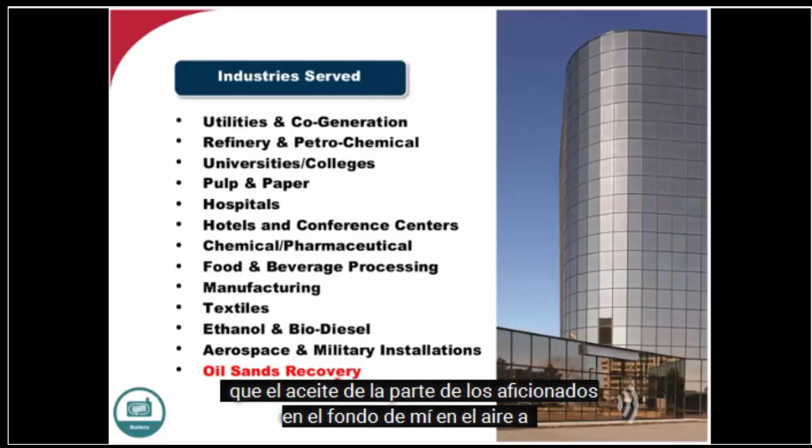I've highlighted the oil sands recovery area as another major market niche, if you will, for our industry. We're doing a lot of good work in the oil sands today, extracting that oil from the sands down deep in the earth. But it's a whole separate topic, and that's why I've got it highlighted in red here.

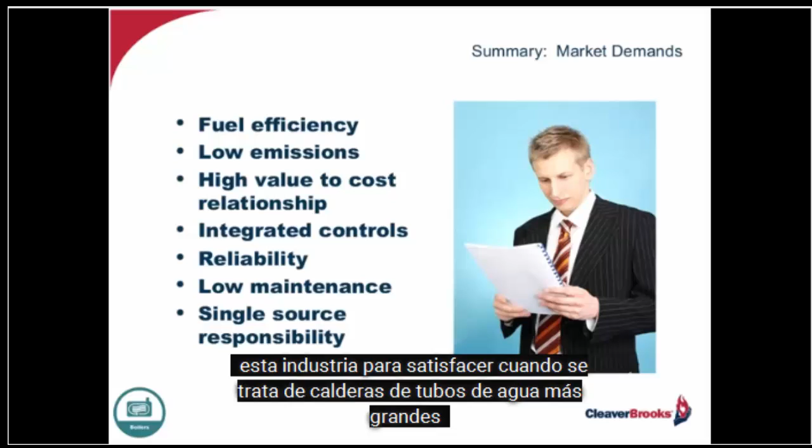So when you take a look in the final analysis, checking over the list of demands our customers have been asking this industry to satisfy when it comes to larger water tube boilers, I believe we've addressed them very well. As far as single source responsibility is concerned, that's an evaluation decision amongst the various manufacturers out there. It also ties closely to the high value to cost demand, which is the cost of the equipment. So if you take a look at the single source responsibility and that high value to cost relationship, those have a pretty close tie. And so in the end, all the criteria are important and should be evaluated very closely.

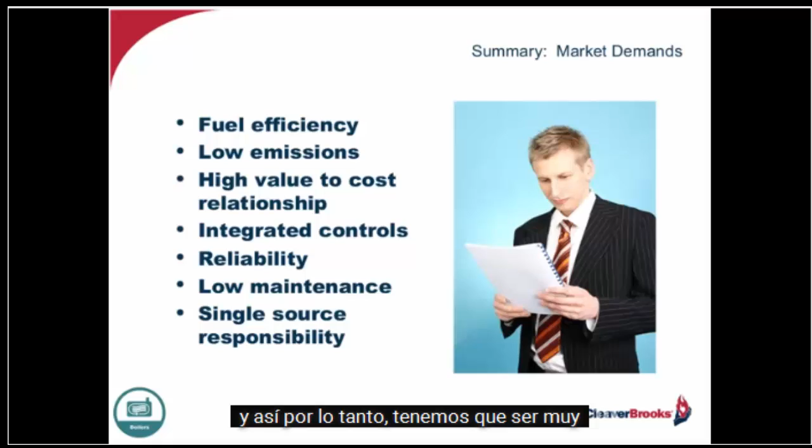But we as manufacturers also have to be evaluated in terms of what we bring to the party before, during, and after a sale, if you will. Very important that we look at that, because there's more to it. It's a huge capital investment, but it's more than just that initial cost. It's what we as manufacturers bring to the party to satisfy your need. And so we have to be very acute and tied into this, because we're talking projects that are very expensive and can be very complicated. So, questions?